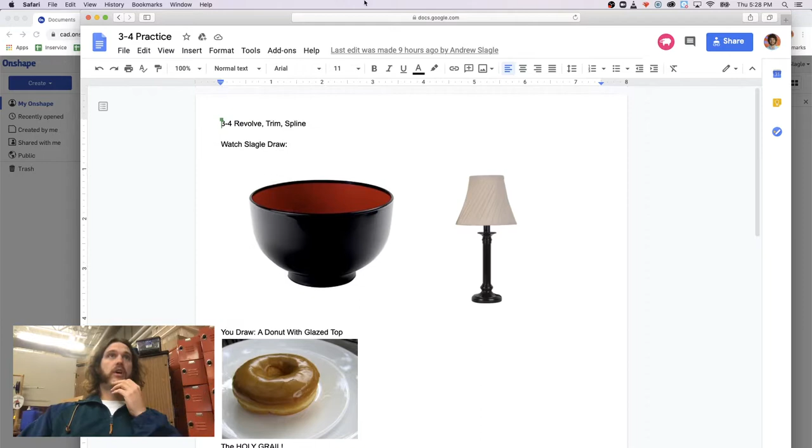So let's go ahead and get started. Create a new document in Onshape.

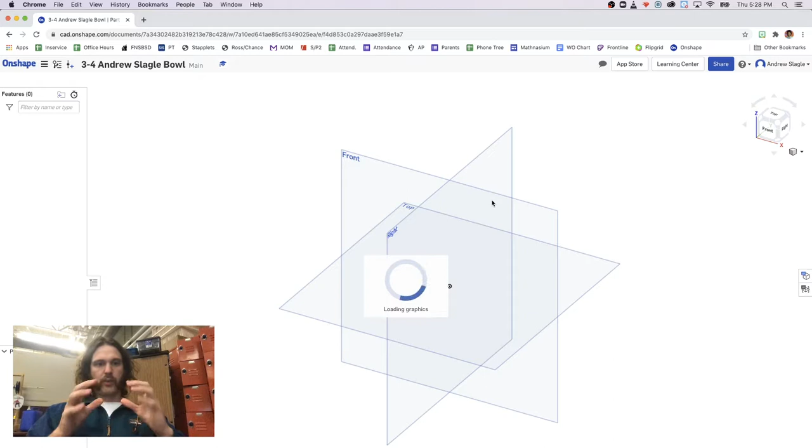One thing that's really helpful to know is how a ceramic bowl is made. They put it on a big wheel, and the wheel spins, and they sit and mold the clay around the very center of that spinning wheel, and they pinch and drag, pinch and drag.

And they pull the clay up into its form to create the bowl. And it turns out we can do something similar—we can spin on a wheel, so to speak, with this program to create a solid.

So first thing I'm going to do is create a sketch on the front plane. I'm going to talk about some strategy for this first. If I want to draw this bowl, we can't use extrude.

Extrude creates something that's long and extends out. With the lamp, we might be able to extrude something right here, but what we're going to do is really the same shape.

It's the shape of the person who's molding the clay on that spinning wheel. They're sitting there molding it as it spins, and they put their fingers in and pinch, then pull to create the shape of that bowl.

So what we're going to draw is the shape that person is kind of pinching up to create the bowl. That's what we're going to draw, and then we're going to take that shape and spin it around upon itself.

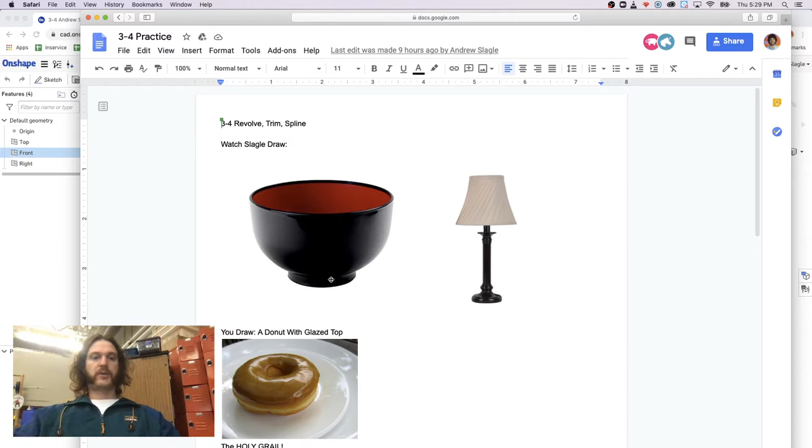Okay, so let's go ahead and create a sketch on the front plane.

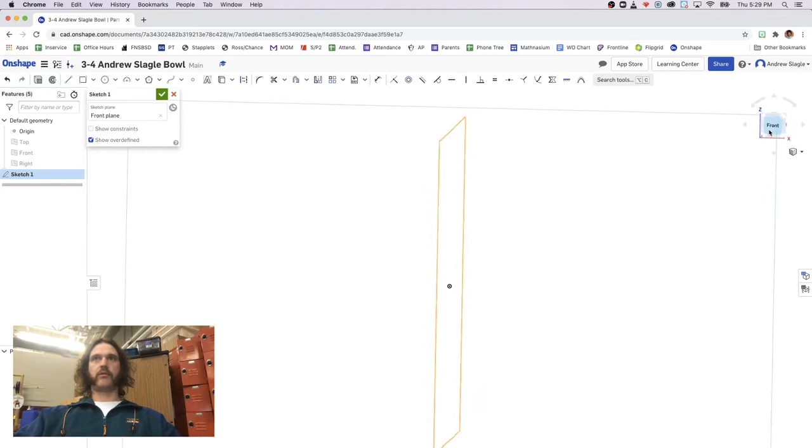Boy, howdy. We got a little bit of a lag going here. All right, so let's go and begin drawing.

Sorry, I'm a teacher. Come on, Slagle, what are you doing?

Okay, so for my bowl first, I'm just drawing really where that person was pinching, and I'm not drawing anything else. So I'm just going to do a rough little sketch here, coming up.

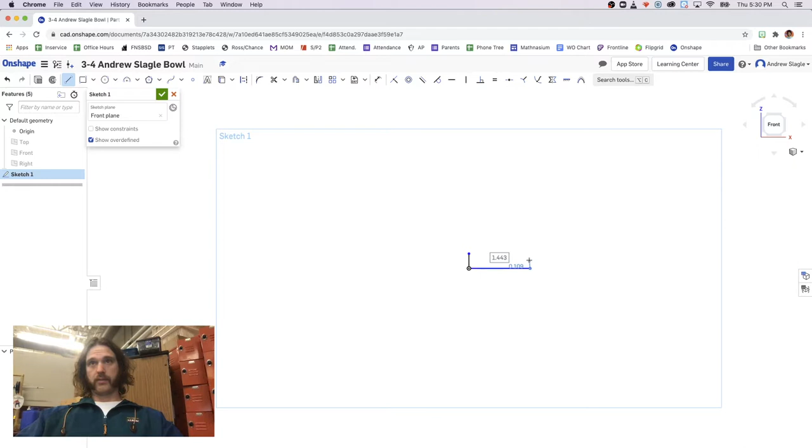We'll come out maybe 1.5 inches or so in this direction—that's probably good enough. Then come up just a smidge, just like that, to create that bottom edge of my bowl. What I'm drawing right now is kind of half of this little bottom edge, because that's one part of where someone would be spinning there.

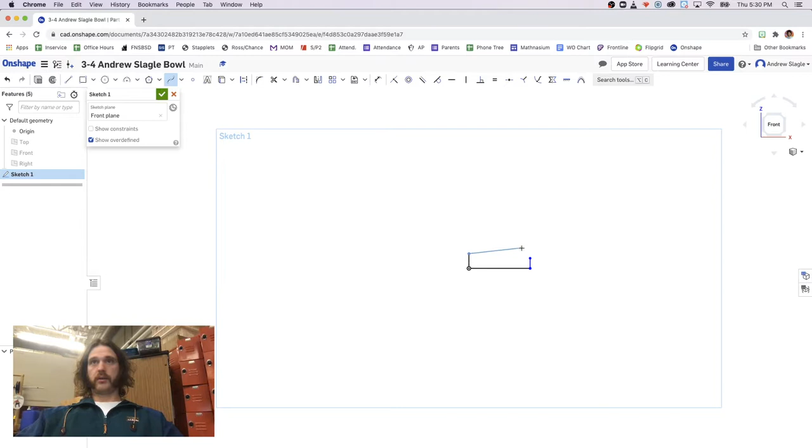Right now, when I'm going to be drawing, go like this, and we're going to create the bowl's thickness. The tool I'm using right now is called a spline.

It's lots of fun. Press escape. Okay, we've got this nice—if you want to change the shape, the spline is right here. It allows you to draw a kind of curve, and you can change these, called inflection points, little points where we can bend and control. The white points help control that bend, but we want a nice, smooth looking bowl shape, and that looks pretty good.

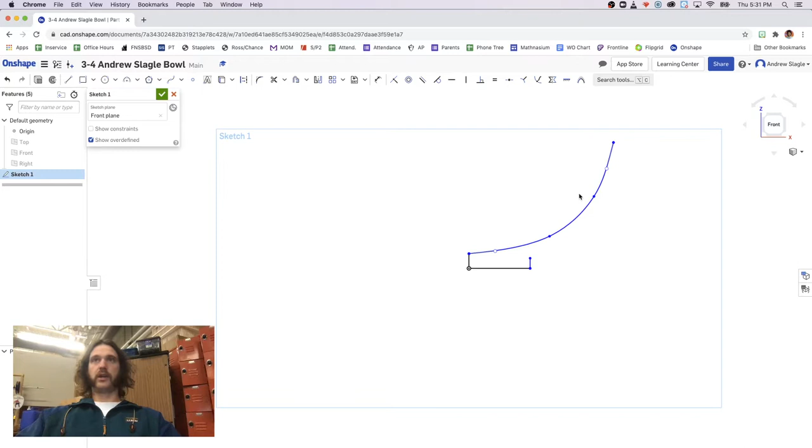We now have to use the line tool to create the thickness of our bowl, so I'm going to come out and give it a little thickness, and then the last line we're going to draw is another spline that's going to be coming down.

And I may have to fix—so that one, it looks like we've got a solid. It doesn't look like it's kind of equal width throughout the whole bowl though, so I'm going to go through and maybe pinch that together a little bit and try to get that looking a little more professional.

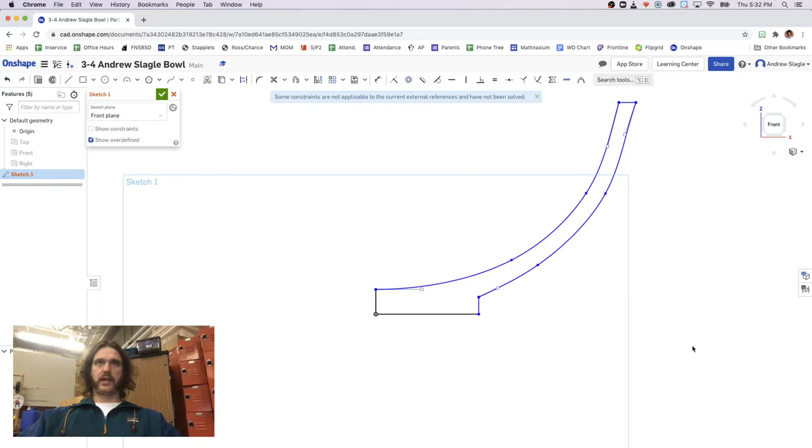It looks about equal to me. Might get a little swoopty in there, make it look fancy. Looks great. Okay, so we've got the center of our bowl. I'm gonna actually drag this down a little bit so it's kind of flat at the center.

So we've got kind of this cross section where someone would be carving while it's spinning. So while the clay is spinning, someone's hand is going to be kind of molding this shape. So now that we've got that shape...

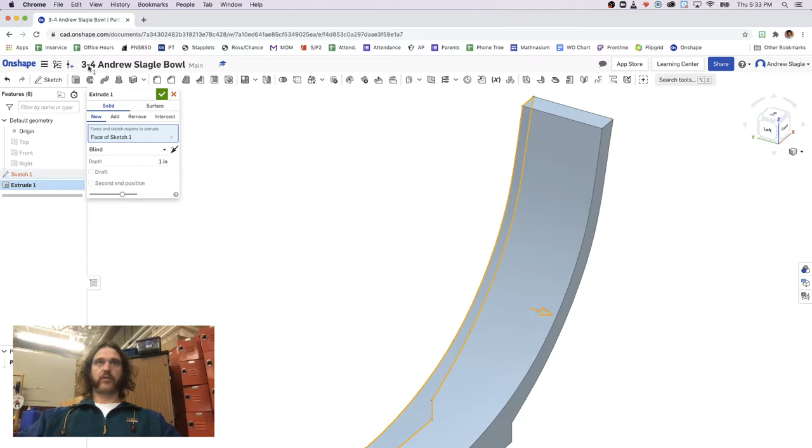Notice that in order for this new tool to work, it has to be grayed out like this. So I'm going to look at it from an angle, and instead, if we use extrude here and click on this shape, watch what happens. We get this solid, it extends out. That's not going to create the bowl. That's not going to work. It creates this really awkward, long, almost like a ramp. That's not what I'm looking for.

We're going to use this tool called Revolve. What Revolve does is it takes this thing and spins it around the axis. So the first thing it asks is, what do you want to be spinning? What do you want to use to help create the solid? Okay, so we have selected this shape, and then we select the axis around which we would like to spin it.

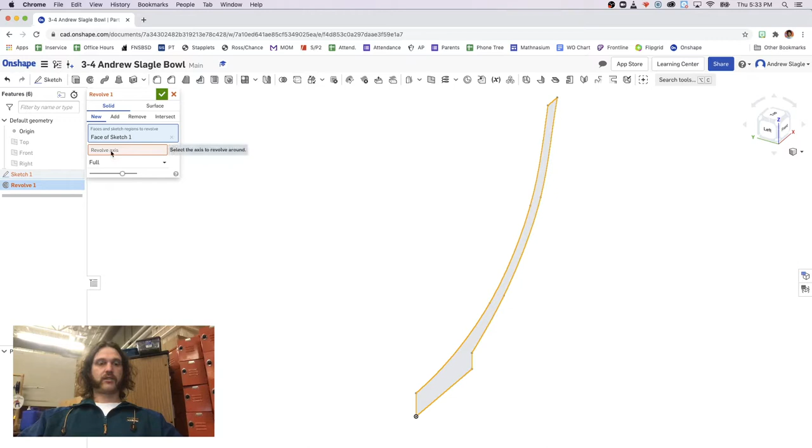It turns out you can select all sorts of lines to be the axis, but the one we want is the center of the bowl, right here. Now when I click that line, it generates this absolutely stunning looking bowl that we can all be proud of, and we can eat our popcorn out of while watching definitely not rom-coms on the weekend.

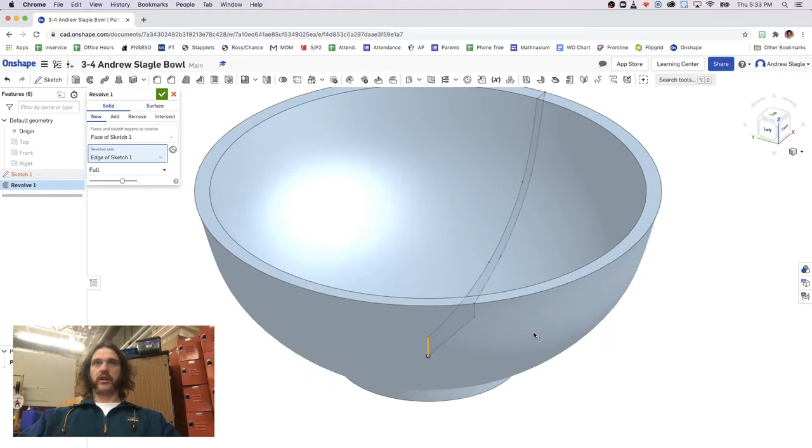Perfect. Look at that bowl. Absolutely fantastic. Now notice if I delete that axis of revolution and select another one, like this one... oh dear.

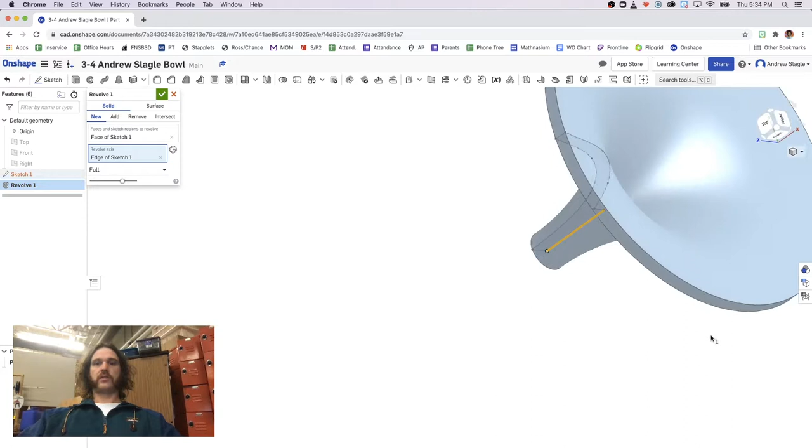We've created this horn shape. So, like I said, I selected the correct one first to show you what the bowl should look like, but you can really create almost any shape you want with this revolve tool by choosing the correct axis. And if you select up here with the revolve axis, you get something that almost looks like a toque, like a hat. So you get a different shape depending on what you select.

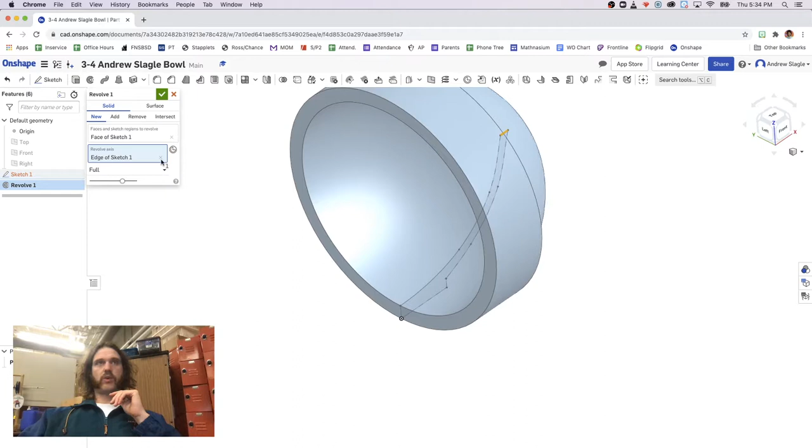It's being spun around that axis, and the program's probably doing lots of calculus. Okay, there it is in all of its glory. Look at that. Amazing, amazing shape.

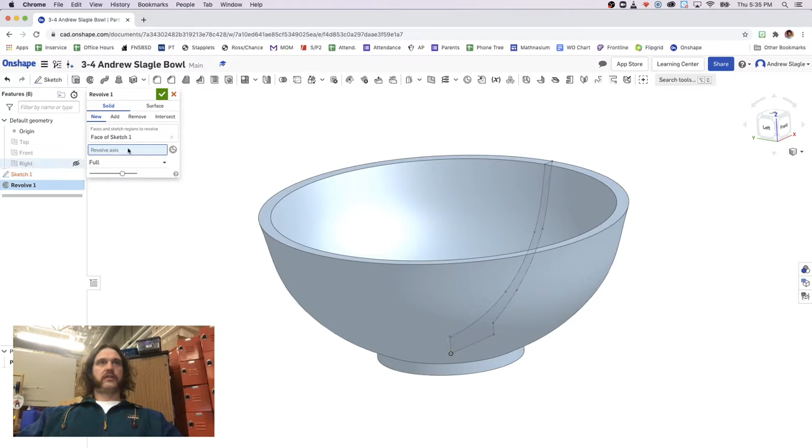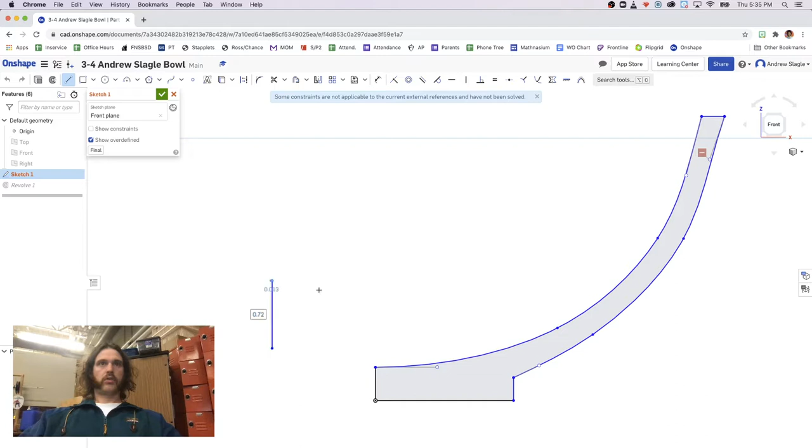One quick note, I'm going to deselect the axis and press OK. I'm going to go into my sketch, and it's important to note that you can also draw an axis of rotation that is not connected to your object. So for example, if I finish sketch and I've got this random line drawn, and then go into revolve...

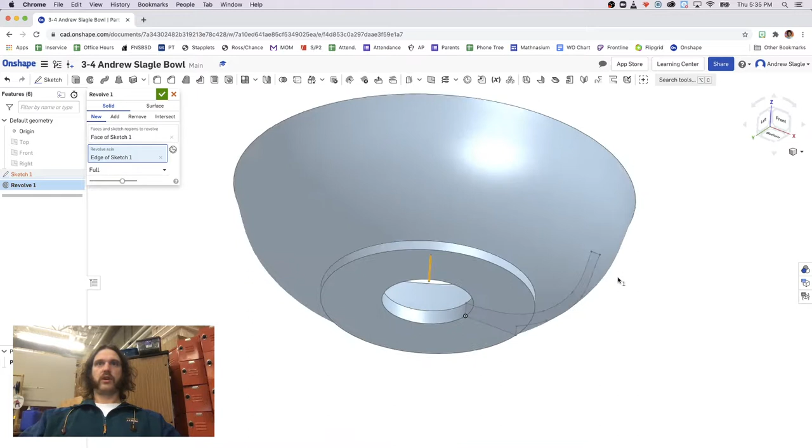It says select this, now select your axis of rotation. If I spin it around this axis, it still creates a bowl. The problem is now our bowl has a hole in it, because there was a gap between our object and the axis around which we were spinning. So we don't want a hole in our bowl.

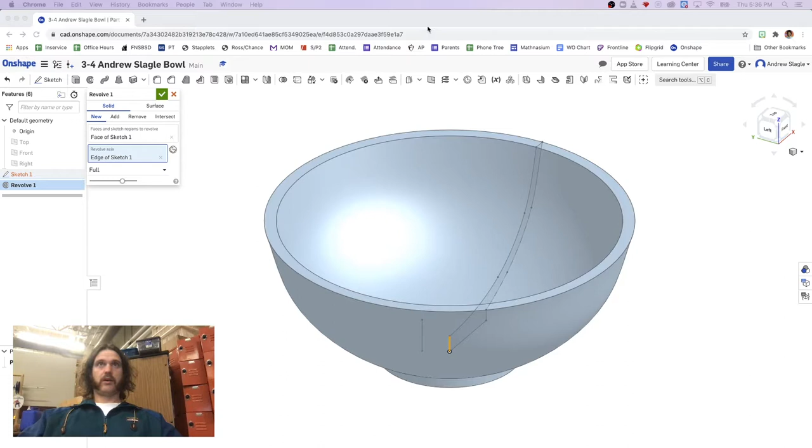So we're going to select this axis instead to do our final drawing. I'm deliberately making mistakes so you can see some issues you might run into, but also because you need to know that one of your drawings necessitates that — that drawing being the donut. The donut has a hole, so to create this hole you need to move your axis of rotation away from your object.

Okay, great. So we've done our whole bowl, and it's looking pretty snazzy. We could plug this into the 3D printer and just go to town. That is an option.

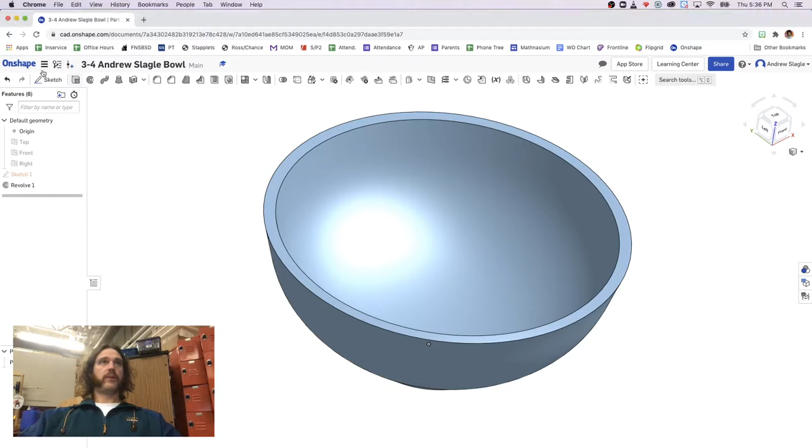All right, so let's go ahead and do the lamp next. If you don't mind, we're gonna jump in there and do the lamp next. So I'm gonna go to the Onshape home. We'll create a new document.

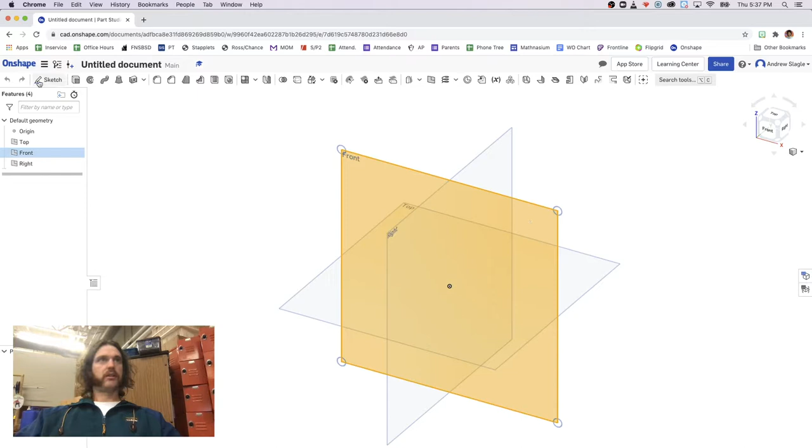Try and do some more stuff that's gonna melt my computer. Thanks, school district, for the nice computer. I think that my processor is about to punch its last ticket.

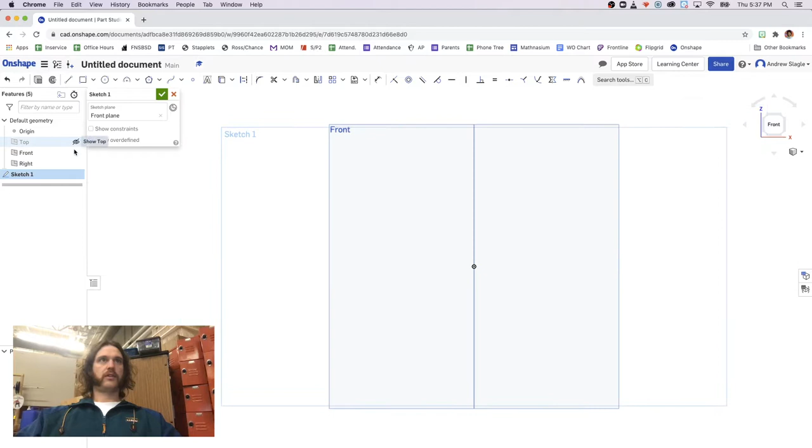All right, so here we go. We're going to draw on the front face again, and I'm going to hide all these planes. See you later, good night.

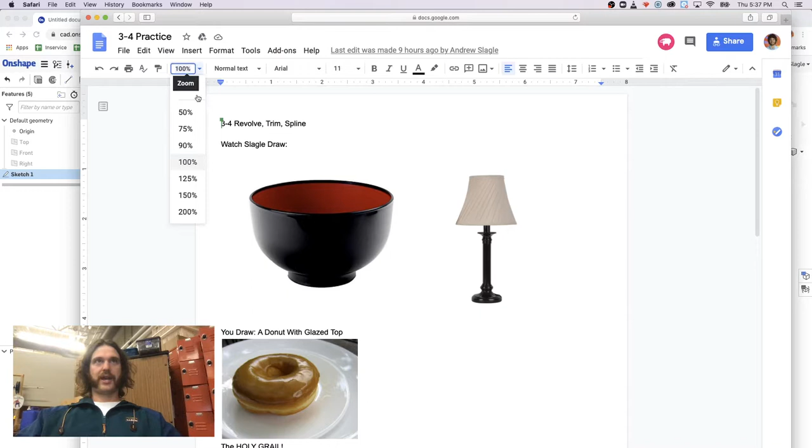Okay, let's go back to this and take a look. What does this lamp look like? I'm going to zoom in, and I'm just going to draw pretty fast so you can see what's going on here. But let's take a gander.

All right, this lamp has got a flat bottom here, comes up and around, and has a straight shot there. All right, guys, let's go ahead and continue here. Sorry, a little phone call there. We're going to come out this direction and create this little swoop, a bump and a swoop. We're going to draw the lamp.

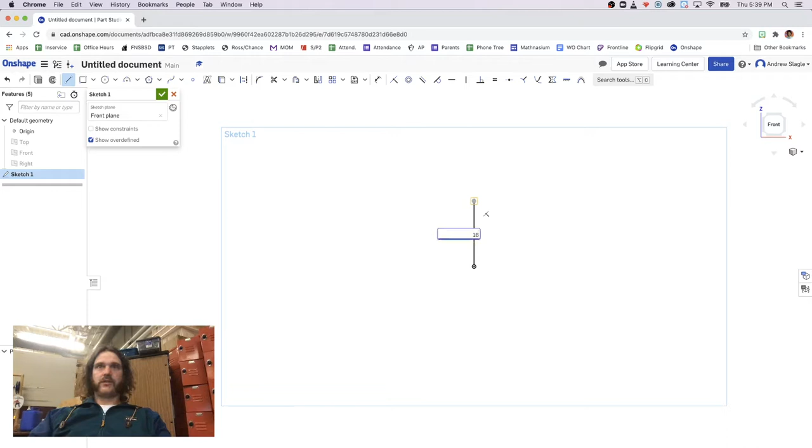All right, so I'm going to start with my line tool and come out. I'd say the height of my lamp is maybe 18 inches or so, so make that pretty tall, and press the front view, get that zoom to fit option. I think I still need to zoom out even more for everything to appear correctly. So maybe 18 inches, and then we'll come out with the base, maybe 3.5.

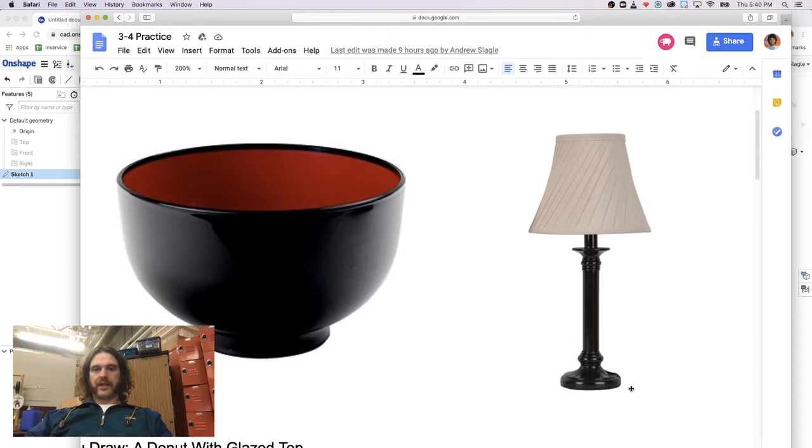Drag my dimensions, and if you look at the image, it looks kind of rounded. So I'm going to use a new tool we haven't used before. Let me minimize my other window here. The tool I'm going to use is the arc tool.

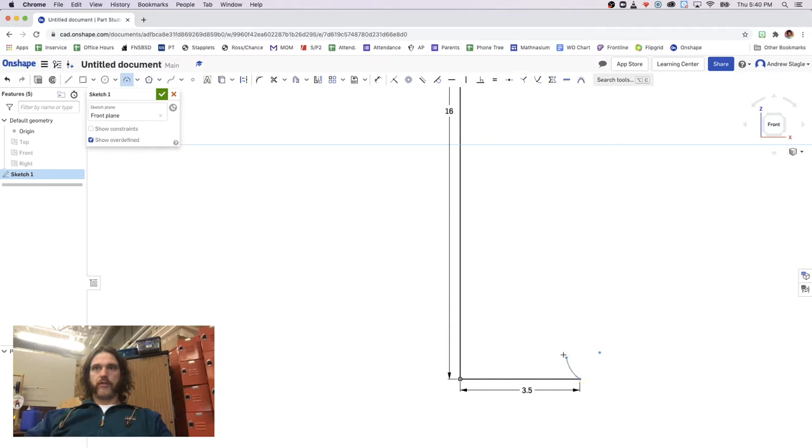So I'm going to come in and use this 3-point arc. You draw the first point, the end point, and then shape it the way you want. So the lamp looks something like that. You can drag the third point, grab my line tool, put a little edge on there, and then switch back to the arc tool, which I think the command is A.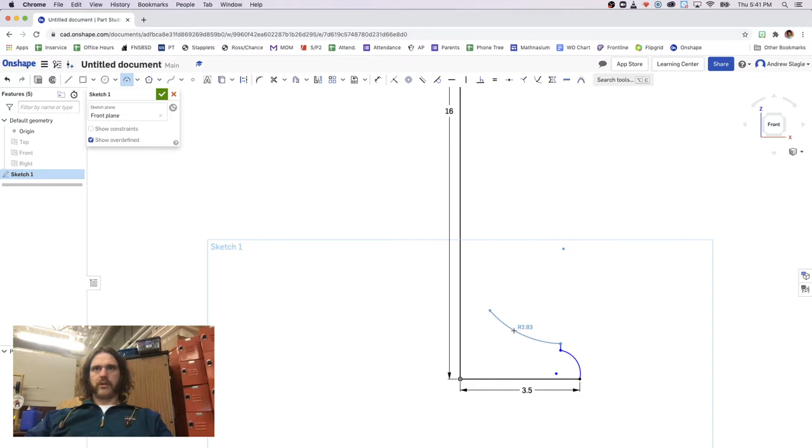We're going to create yet another swoop for the thickness of our lamp. You can pull that in and out, but I'd say it looks something like that. That's pretty good. Okay, great.

Now we might even be able to apply a fillet to that edge to make it a little rounded. I think that's an option. I wonder if we can just click the point. Yeah, look at that, a nice little rounded edge there for our lamp. Click, and that's going to look really solid.

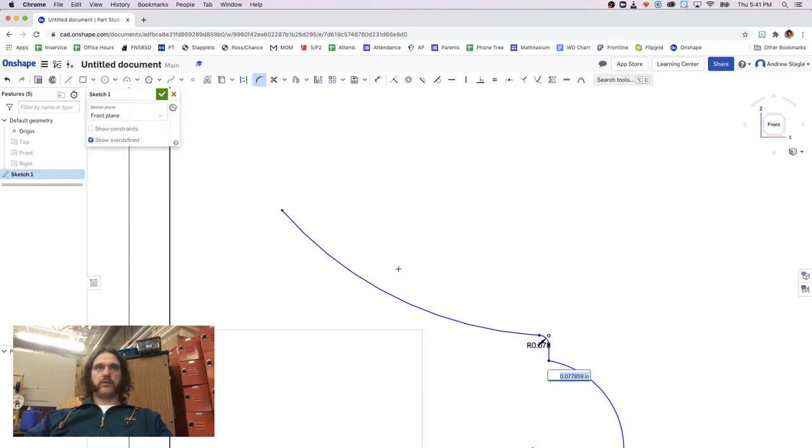Okay, so we've got our lamp here, and we've got our lamp post. Now what I'm going to do is create my light bulb. So I'm going to come up here—normally you wouldn't draw a light bulb in this drawing if you were actually drawing the object, but that's okay.

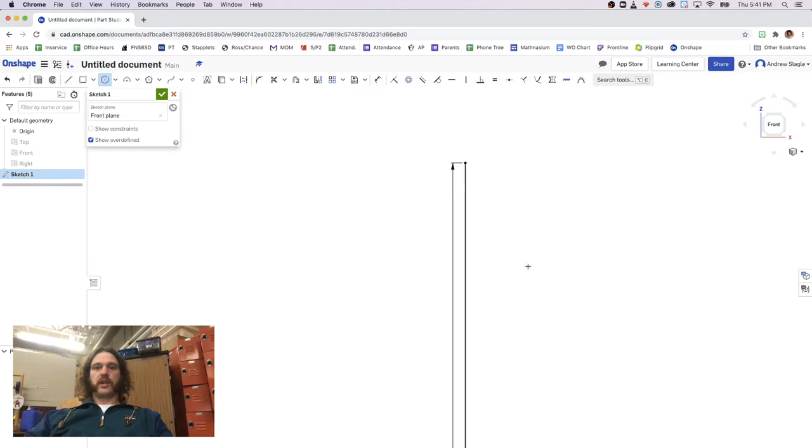Let's make sure we get our proportions right. I'm going to zoom out a bit, and when I draw my light bulb, we kind of know what that should look like. I want it to start down here, come up, and connect at the end. So there's our light bulb in all its glory.

I'm going to come in, and we're going to use the arc tool to connect the base of the light bulb to where it is going to screw into the port. So a nice little rounded section there. And then I'll come in.

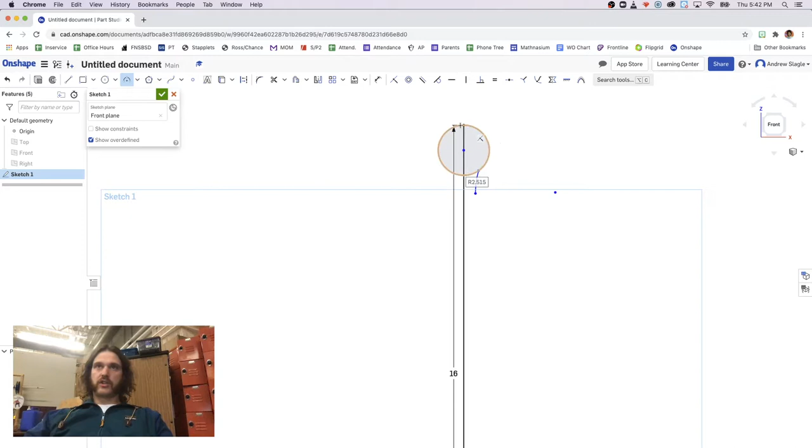Now notice, remember, I'm drawing half of my drawing. So if you have a section of a line between two endpoints, like between two line intersections, that you want to get rid of, you can use this tool, Trim. You can come in and snip those lines away. Now I want this to be one solid figure, so I'm going to be snipping away the lines I don't want.

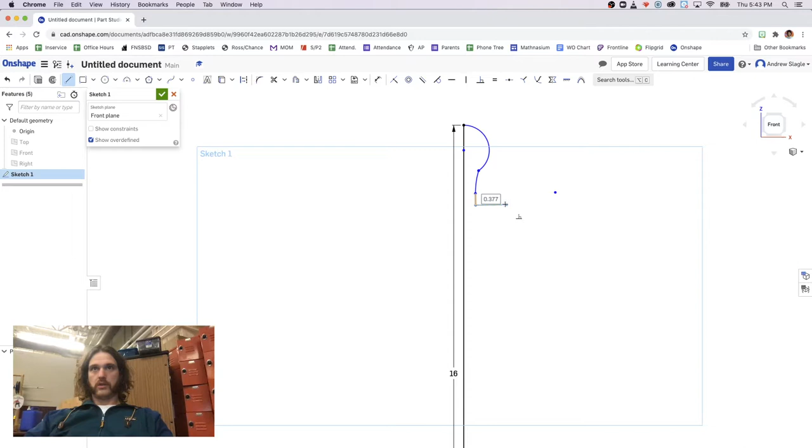So there's the edge of my light bulb, and that's probably screwing into like a square-ish port. So I'll come down like so, and maybe come out this direction just a smidge, like that. Okay, and come down, put the edge. It's looking pretty good. All right, I think we've got a good looking lamp coming along here.

All right, so next, coming down, I'm going to do my arc. First I want to know where the thickness of this line is so I can connect to it. So I'm going to do a regular line, and we can use the trim tool. Honestly, the stem is looking a little thick there, so I might drag this point in a little further.

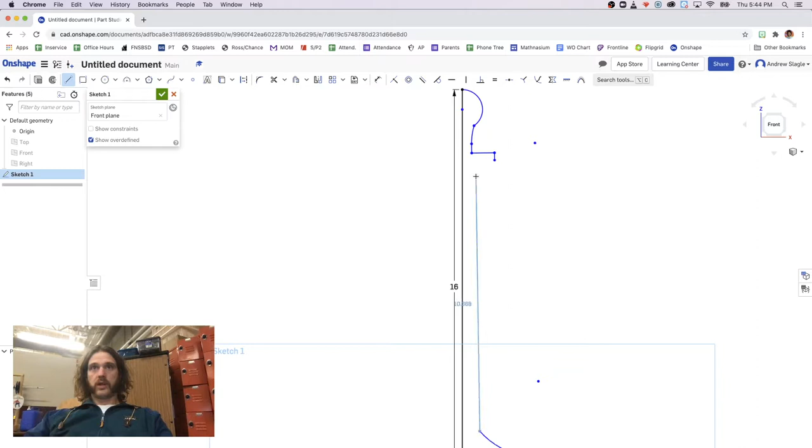Grab my line tool. I'm going to come up vertical as far as I can, then grab my arc tool and come down and connect right here. That created a solid shape, you'll notice. And if we use trim, we can come in and, kind of like scissors, clip off those little extra pieces that we don't need.

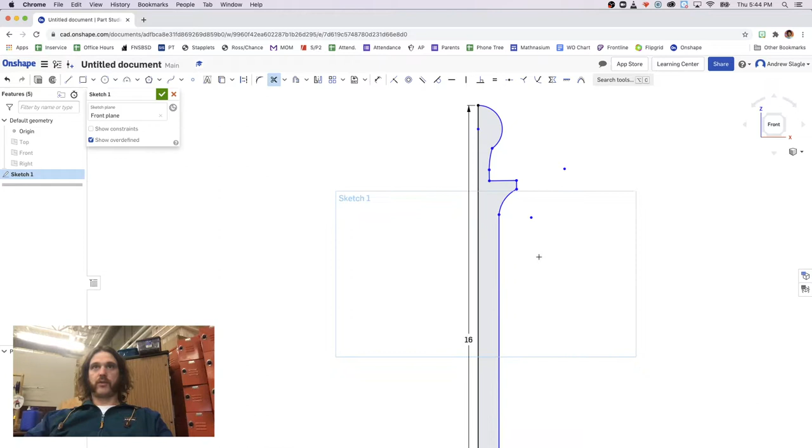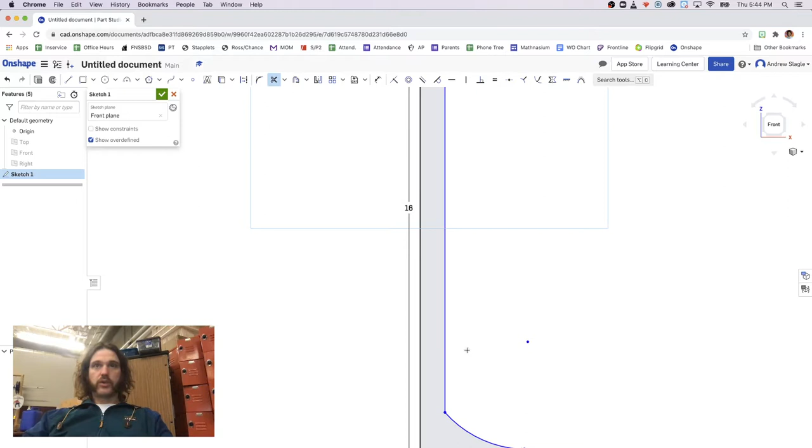Great, we've got this solid shape, but I did forget something. It's got these little bumps and ridges, and I want to show a cool technique for creating something like that. So I'll zoom in here a bit, scale and drag this up so we can see what we're doing.

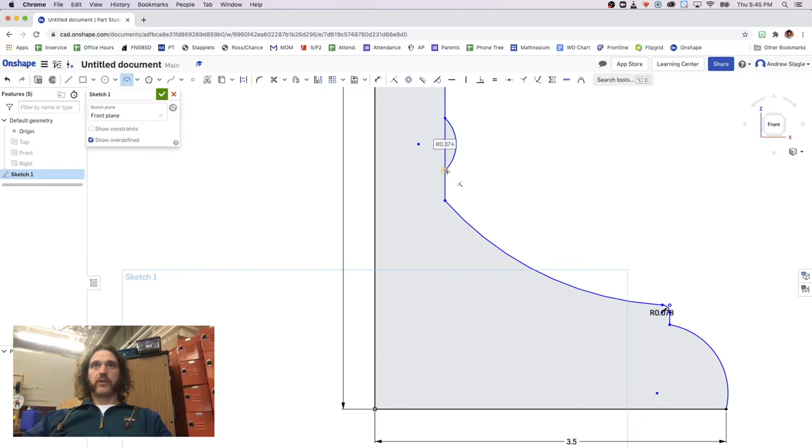If you want to create those bumps or ridges, a cool trick is to use the arc tool, click on your line, click up here, and pull that little bump out. Then down here do the same thing. That's creating a bump on a closed figure on our graph, and it looks like there's one at the top as well.

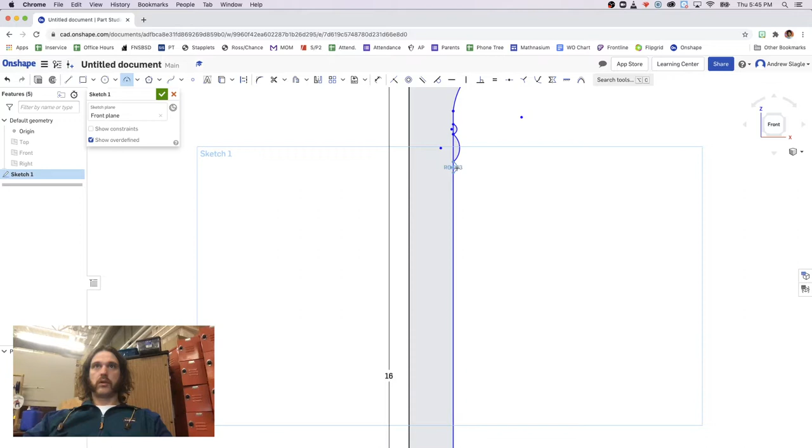So I'll zoom out here and we'll put some bumps up at the top too. I'm not really paying attention to size here, but that's okay. Put a bump there, and a little bump there.

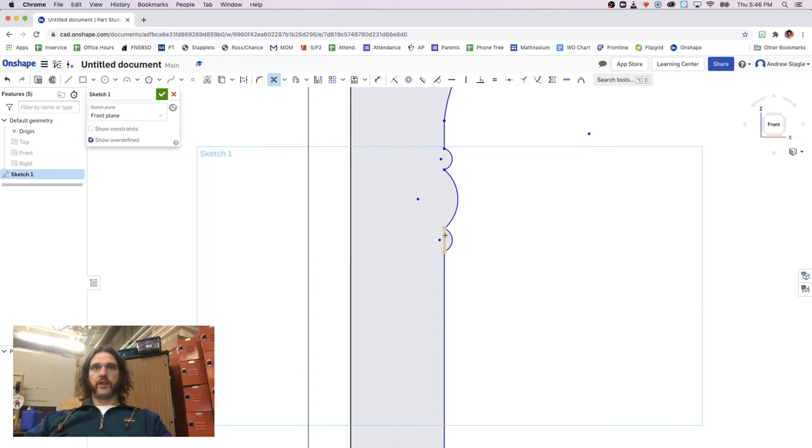Okay, so if we try to spin this thing and revolve it, these bumps aren't going to be on it. You've got to make sure you trim away these lines so that they become part of this other figure. We now have one solid that we're rotating. Zoom out, come on down.

Okay, and the only thing left for our drawing is the lampshade. So I'm going to grab my line tool and put the top of the lampshade, maybe it should be right there. Then grab my line tool, come down here, and put the bottom of my lampshade right down there.

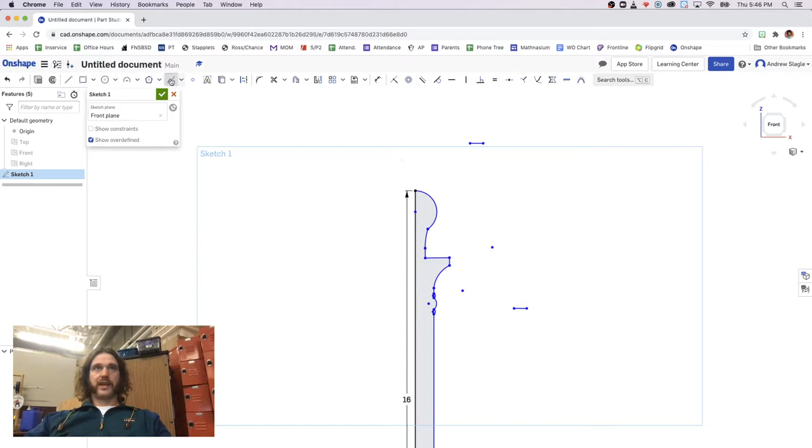We'll probably use the Spline Tool to connect those. Come down here like this, create my swoopty. Press escape. What's the hotkey? There's no hotkey for spline—it's unfortunate. So we'll come down like that, put the point, and we can always drag and relocate if we need to.

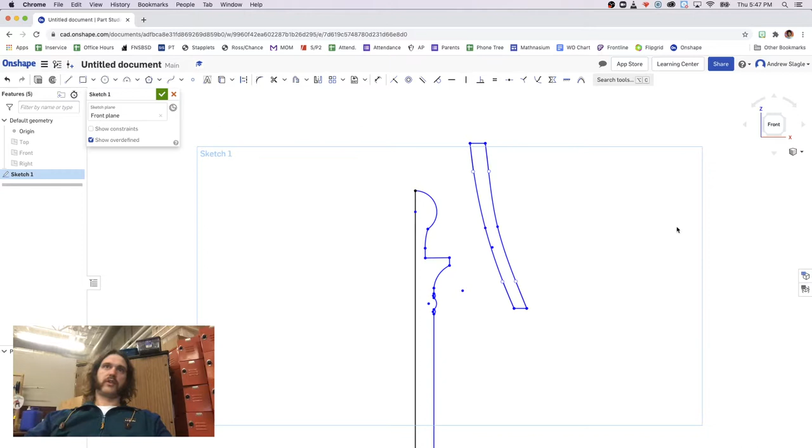The lampshade's looking a little thick, so I may need to narrow that up a little. That's okay, it's whatever, it's looking fine for me. All right, so we finished our sketch, got our figure drawn. Let's zoom to fit so we can see that.

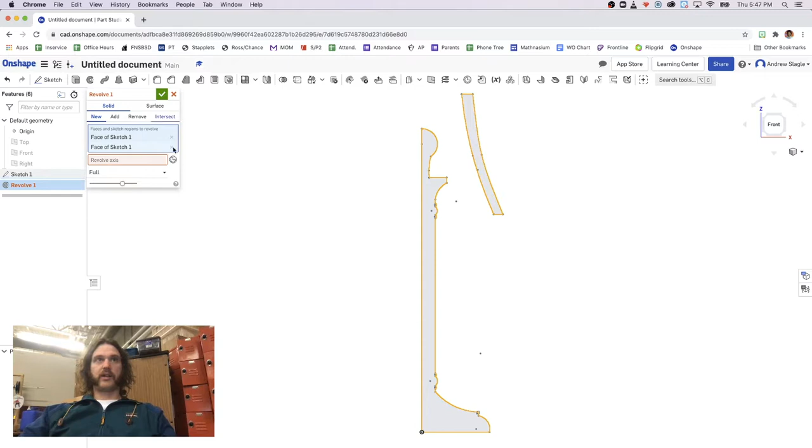And then we're going to revolve. So we'll grab the Revolve tool. We're going to click the sketches or regions we want to select—I'm going to be clicking two. You can select multiple, and then choose the axis of revolution. I want to spin around the center.

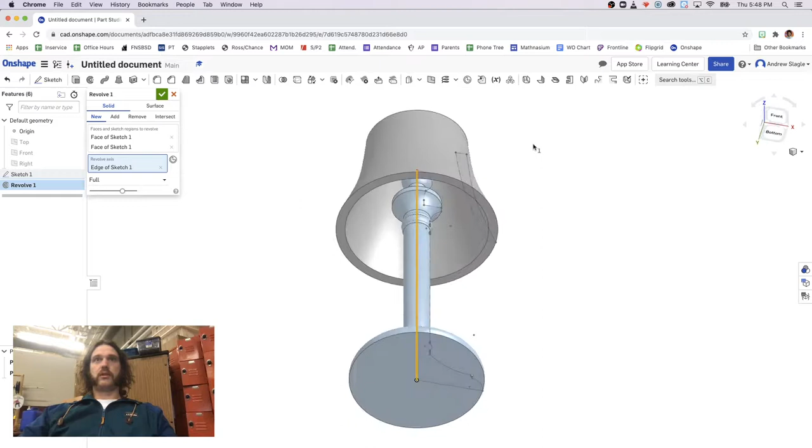And we get a beautiful lamp around which—oh, my light bulb got rotated. We're good, we can see our sketch. We get this beautiful lamp that we'd see at basically every Motel 6 in the country. Look at that—nice looking lamp and table. Good stuff, so that's it.

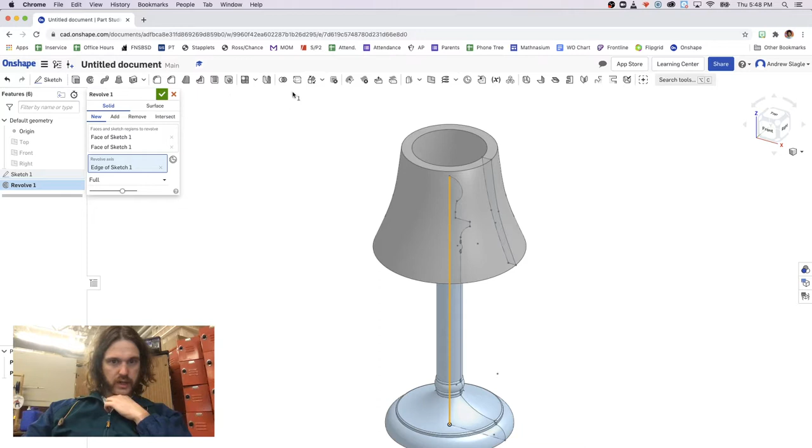We learned the Spline tool, we learned the Revolve tool, we learned the Trim tool to get rid of any excess lines that go past an intersection, and we also learned the Arc tool. So I hope that was helpful, and yeah, we'll see you next time.